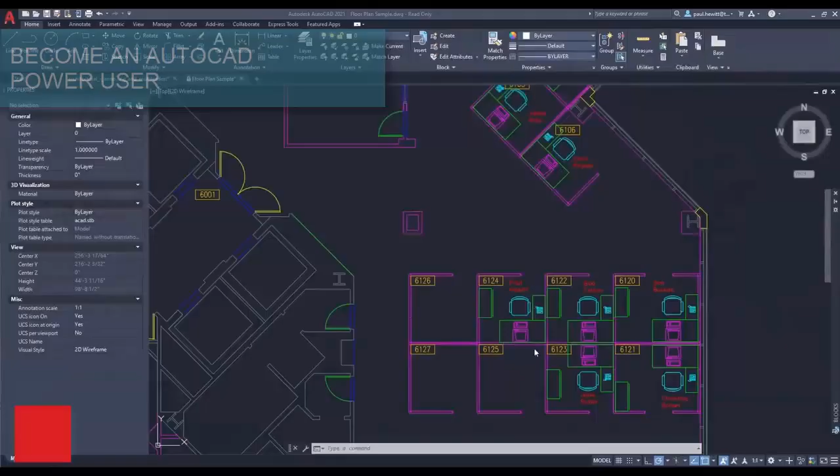Copy and paste options. Copy and paste like a pro by utilizing all of the options available in AutoCAD.

AutoCAD provides some special cut, copy and paste options found in either the right-click contextual pop-up menu or in the clipboard panel of the Ribbon's Home tab. Keyboard shortcuts are also shown in the pop-up menu for even faster access.

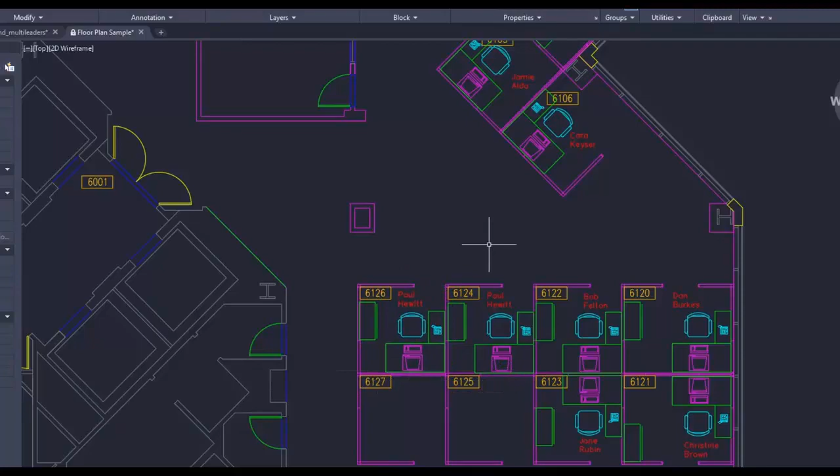Some of the special options include being able to define a base point when selecting your entities, so you can then match the insertion point in your target drawing. You can then paste them as a block, a hyperlink, or to their original coordinates. The ribbon also gives you access to the paste special command, useful for when pasting spreadsheet data.

Command options. Uncover additional functionality you may not be aware of in the command line.

Make sure to look at the command line while the command is in use. It will always prompt you for the correct input sequence and may provide various options for how to use it. For example, both scale and rotate commands have a reference option allowing you to use selected distances or angles.

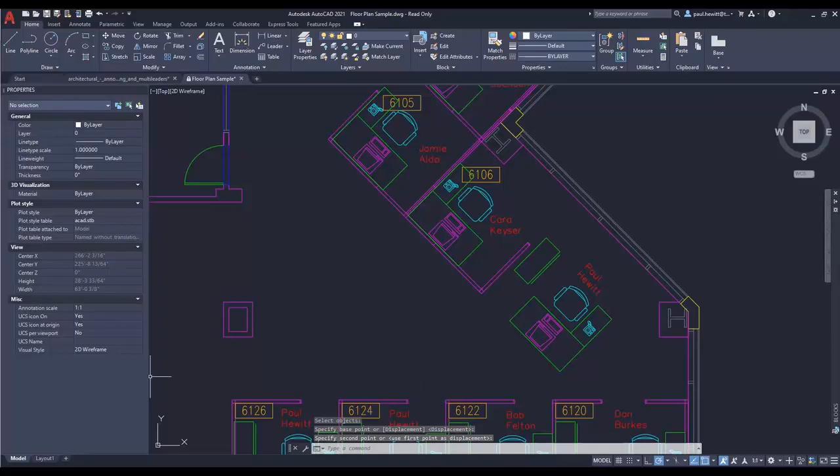The fillet and chamfer each have a polyline option, so you can edit all vertices of your polyline with just one click. Even the zoom command has options such as all and extents.

Accessing these options is as easy as entering the highlighted hotkey or by clicking the option word. If you have dynamic input turned on, all of the same options are available from within its pull-down menu.

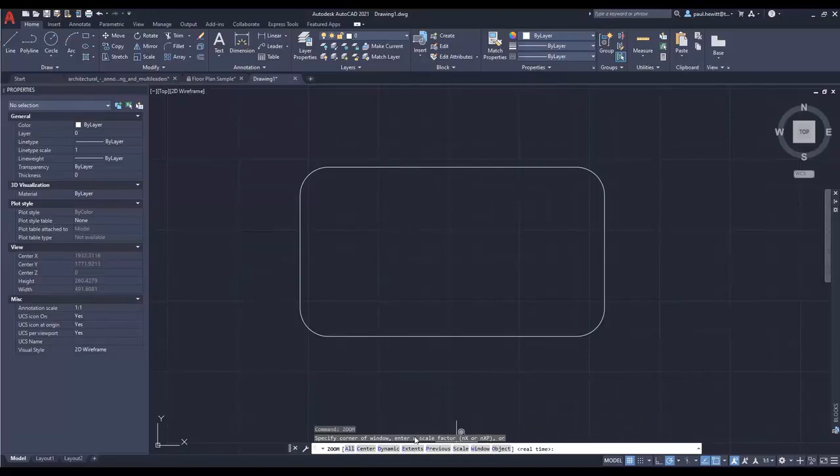Keyboard combos. Take advantage of AutoCAD's keyboard shortcuts that can improve your productivity. Here are two to get you going.

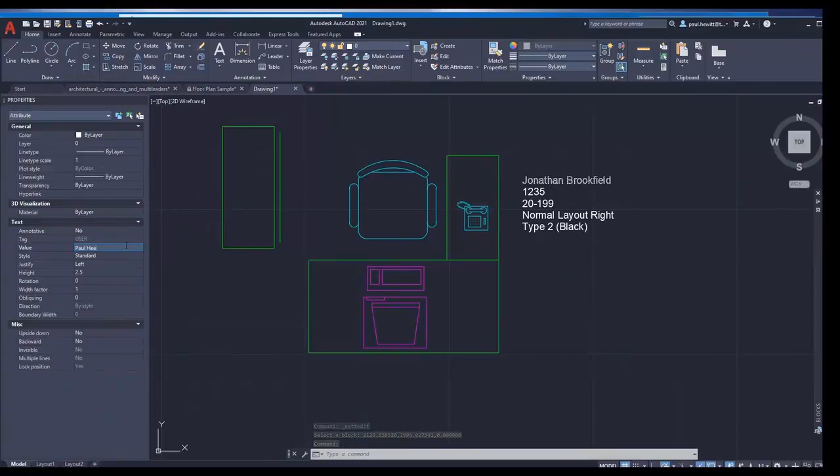Bypass the Enhanced Attribute Editor. To quickly edit an attribute, hold down the Control key when selecting the attribute, and it will highlight similar to single line text for editing.

Clean up those corners quickly by using fillet or chamfer, holding down the Shift key when selecting the second object.

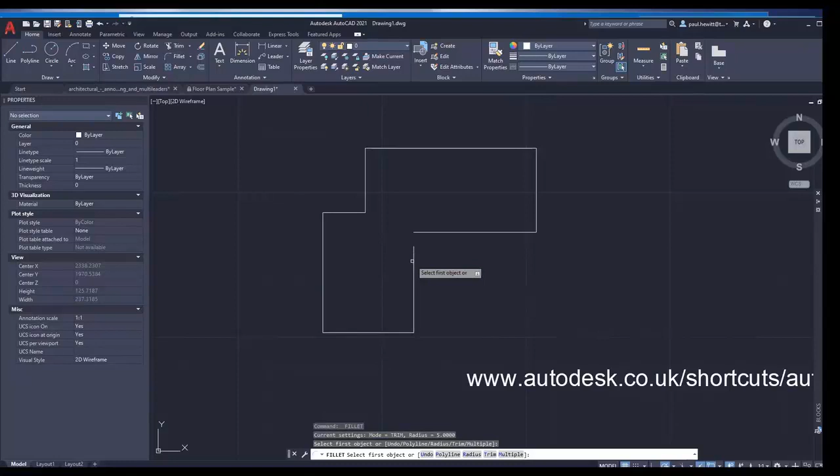To reference all AutoCAD shortcuts, just visit autodesk.co.uk/shortcuts/AutoCAD.

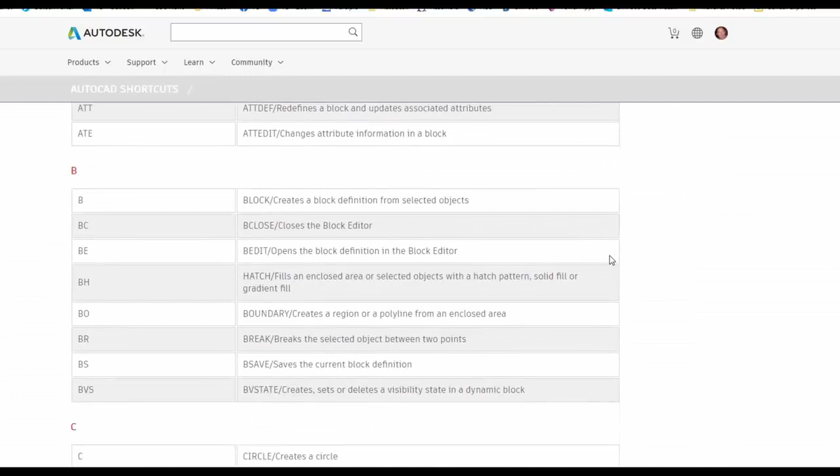Viewports. Lock down your layout viewport settings to avoid accidental changes. Don't let a pan or zoom mess up your carefully constructed and scaled layout viewports. Once you have it right, always lock the viewport.

Here are two ways to do so. First, select the viewport, right-click from the contextual pop-up menu, expand Display, Locked, and select Yes. Or click on the lock icon next to the annotation scale in the status bar - this is the easiest and most common method.

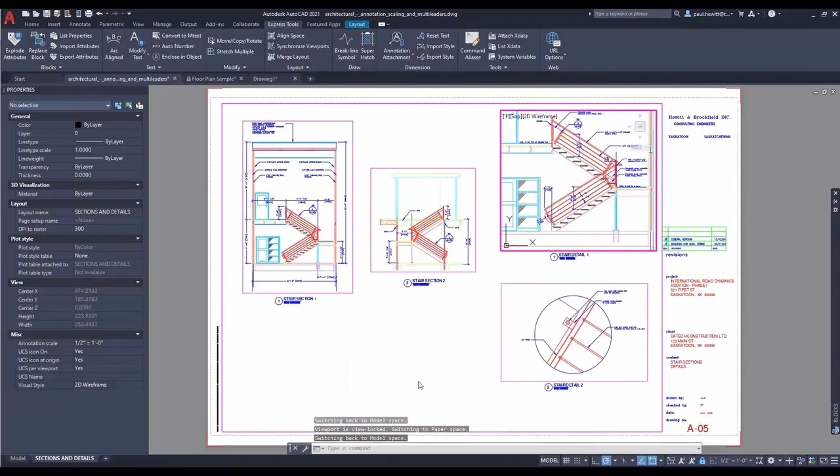AutoCAD on any computer. Access, edit and design CAD drawings even when you're away from your primary workstation with the AutoCAD web app. Open a web browser and start designing in the AutoCAD web app on any computer. There's nothing to install. Working in the AutoCAD web app is much like working in the AutoCAD desktop.

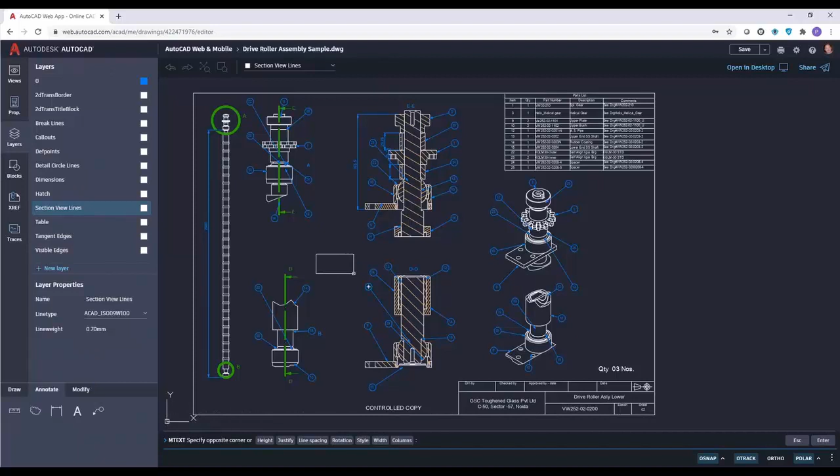Because the AutoCAD web app has ribbon tools and command line, you can get up and running quickly by going to web.autocad.com and signing in with your Autodesk ID. In this case, we're just going to add a piece of text to this drawing.

So that's web.autocad.com.

Blocks palette. Insert blocks more efficiently with the blocks palette. Easily find the blocks you need with thumbnail icons that provide a preview of available blocks to insert. The palette's 3 tabs allow you quick access to find the block you need.

You can find blocks from the current drawing, from libraries, or from the most recently inserted. No matter what tab you're working in, you'll still have access to all your familiar insertion options, such as scale, angle, rotation, etc. And you can even check the repeat placement option to save additional steps.

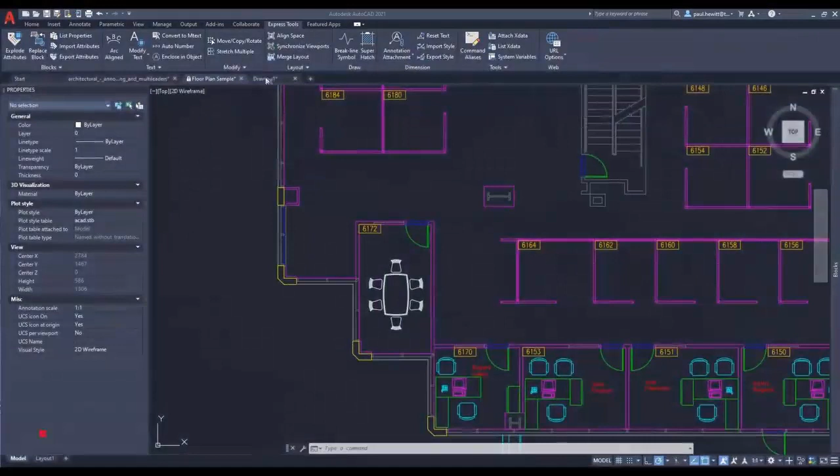Favorite places. Stop wasting time by continually navigating multiple levels of folders in the File Open dialog box.

Once you get to your folder, click on the tools in the upper right corner, then add current folder to places. A new icon will appear with the name of the folder. Now you can just click on your new place to jump right to the folder.

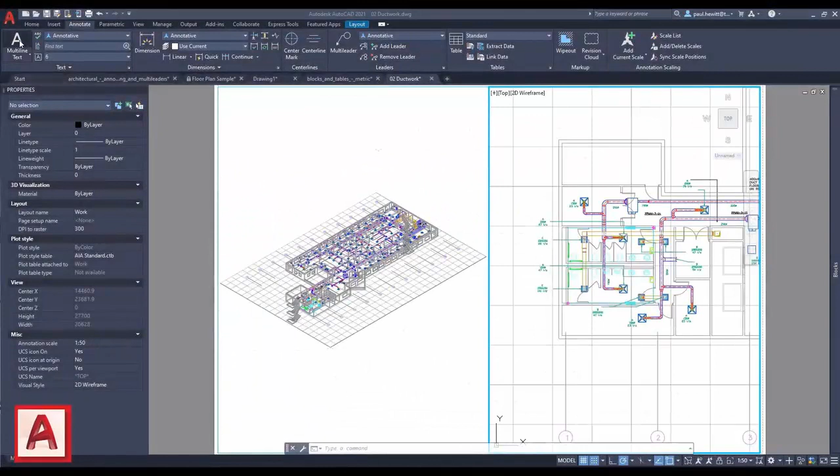Annotative scaling. Display the same object at different scales in model space or a layout using the annotative feature. When you set objects or styles to be annotative, the process of scaling them becomes automated for you.

To automate scaling, select the Annotative checkbox in the Style dialogs or set individual objects in the properties to be annotative. Annotative scales can be added to an object either manually or by assigning them, or by allowing them to be added automatically by the viewport.

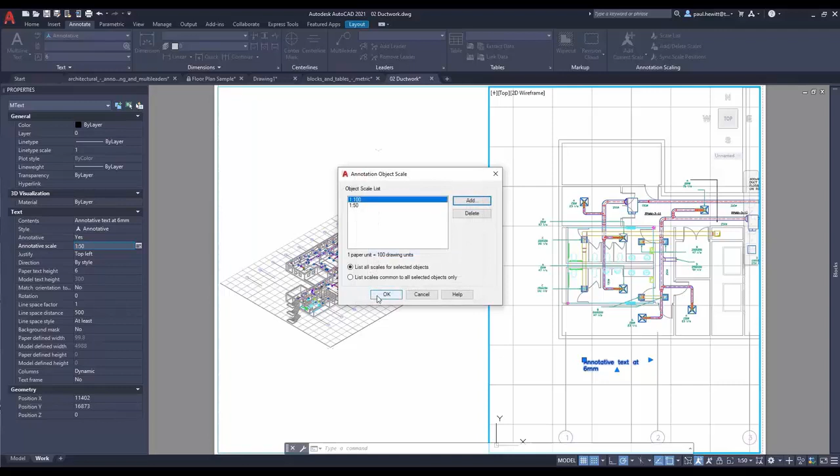Once the scales are added to the object, it will appear at the correct size for that scale. In addition to annotative objects such as text, mText, dimensions, multi-leaders and attributes, blocks and hatches can be set to be annotative as well.

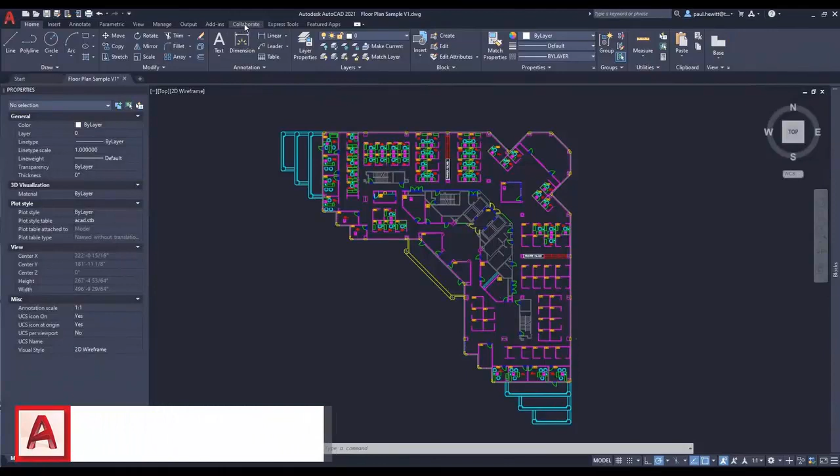DWG Compare. Identify the differences between two drawing revisions with DWG Compare. DWG Compare allows you to quickly view the differences between drawings.

All objects that are in both will show as grey. Those not in the current drawing will be red, and those only in the current drawing will be green.

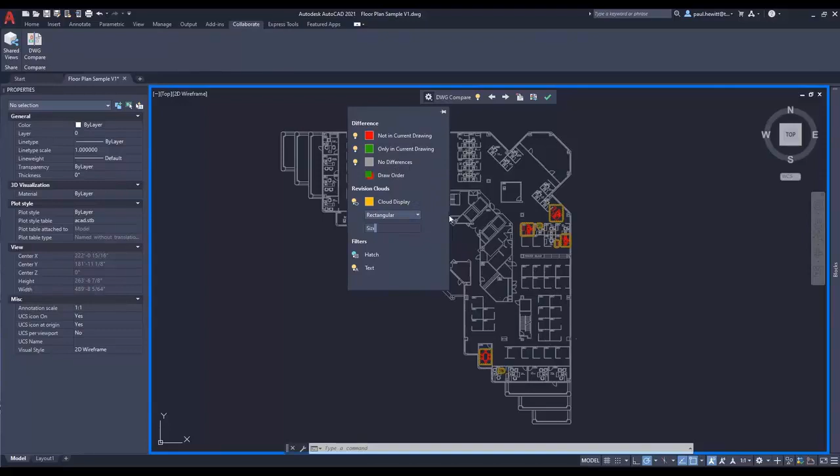To continue your current editing session, you can toggle your comparisons on and off, and any changes that you make will reflect in the comparison in real time. You can even bring objects from your compared drawing into your current one.

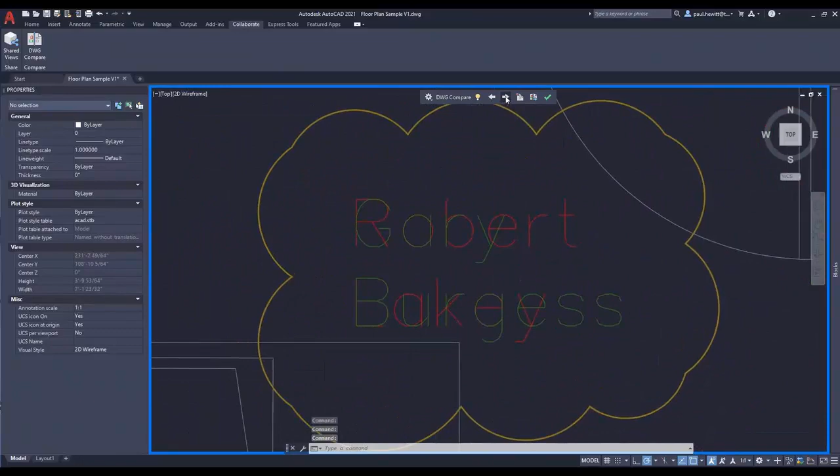DWG Compare can also insert revision clouds, which may speed up your change process by predefining colour, style and size preferences.